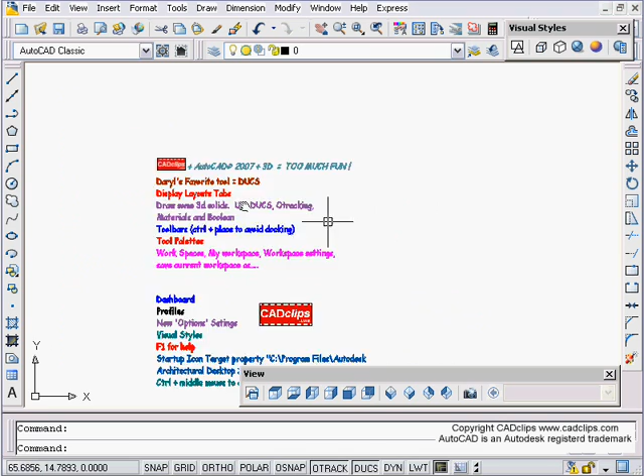I'm going to zoom out a little bit over to here, and using my view toolbar, if you right click on any toolbar, you can see all the toolbars, and there's lots in there. I'm going to start by going to, for instance, a southwest isometric view on my view toolbar. Now I want to draw some solid objects or do some modeling. So I'm going to right click in here and grab my modeling tool. We'll show you later how you can use workspaces to save all these configurations.

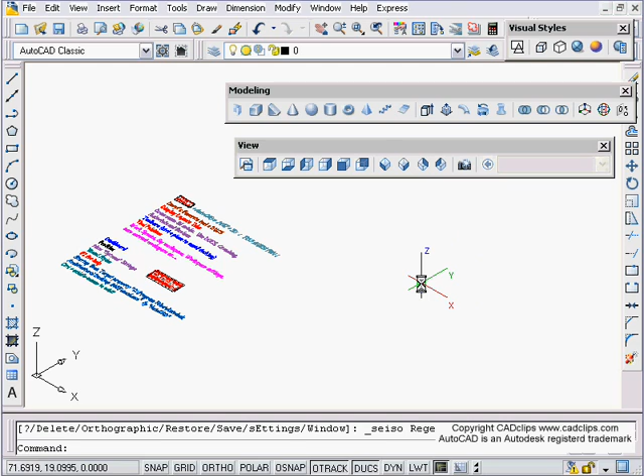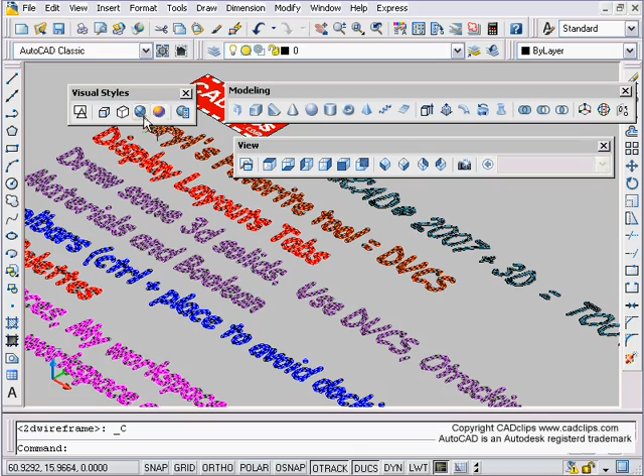So I can start by clicking on the box tool, drawing a box, placing it up. If I have my visual styles toolbar, you can click on here, and you can see different visual styles for that 3D object. You'll also notice that visual styles actually affect text as well. Kind of neat when you zoom in on it. So different things you can do with that.

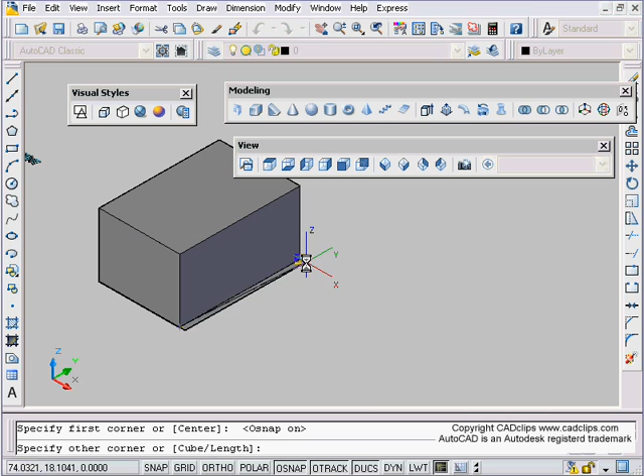Now what I can do is, to continue along here, I'm going to draw kind of a wedge here. So I'm going to click wedge. I need an object snap, so I'm going to hit my F3 or turn my object snaps on, and I'm going to use object tracking and lay a node in over there. Placing it once places it; hovering again removes it. So I need to replace that.

Now I can drag down like that, and then I can drag up, and if I can find that endpoint, I can click on there. I might have to change to wireframe to make that a little easier. Let's try that again just so you can see what's going on. I'm going to click on here.

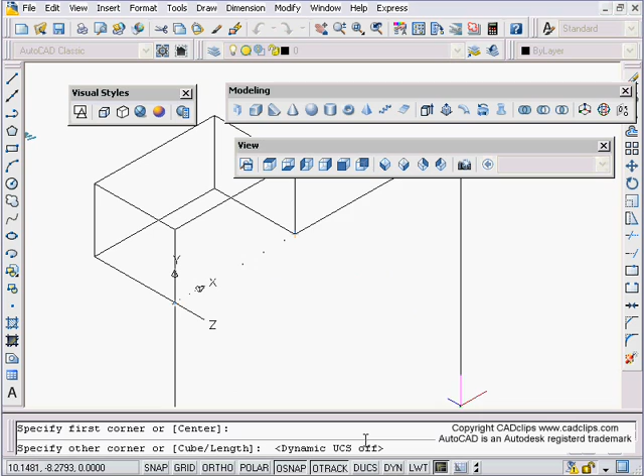I'm going to place, oh, now my UCS. I don't need my DUCS for this one. DUCS. Wedge from here. Notice it started to draw up the side of that wall. Click, and now I can go pick that endpoint. Okay, I had to turn my DUCS off because the purpose of DUCS is that I can do this.

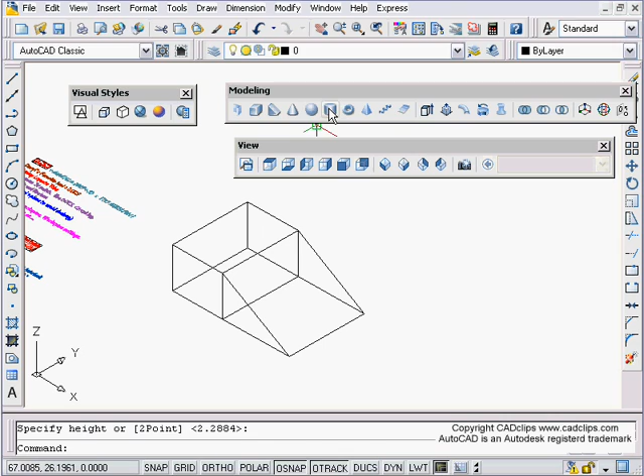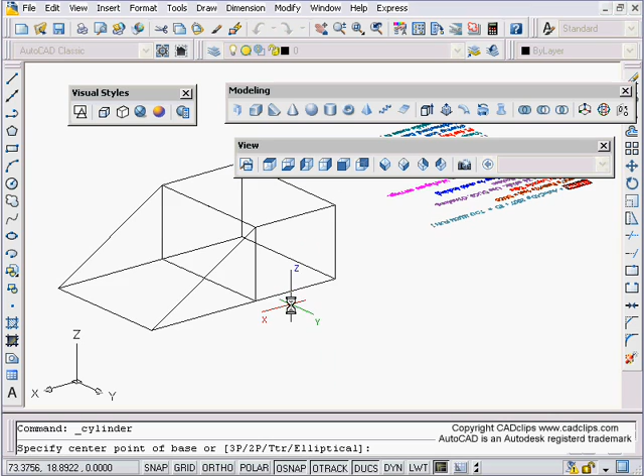Go grab, for instance, a cylinder command. If this is on, which was what was doing before, now I can hover over a different face and draw right on that face, which is absolutely wonderful. And using shift middle mouse button, you can hover around. So I can pick on a face.

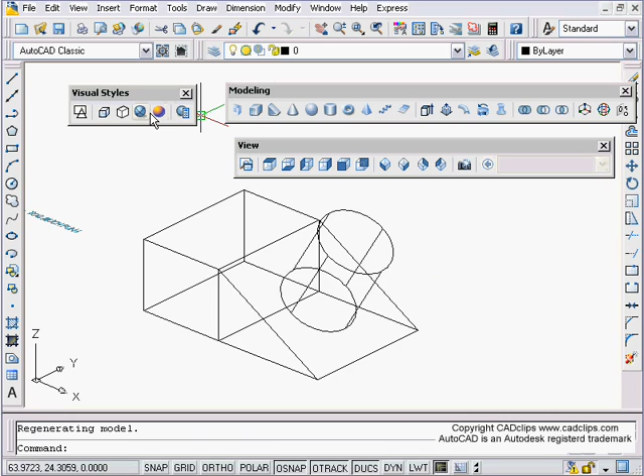Not only that, I can use my object tracking by picking points, a midpoint there and a midpoint there. And if I drag down, guess what? Now I'm drawing that cylinder directly on that face of that object. Shift, middle mouse button, spin it around, go back to my visual styles, see what I have.

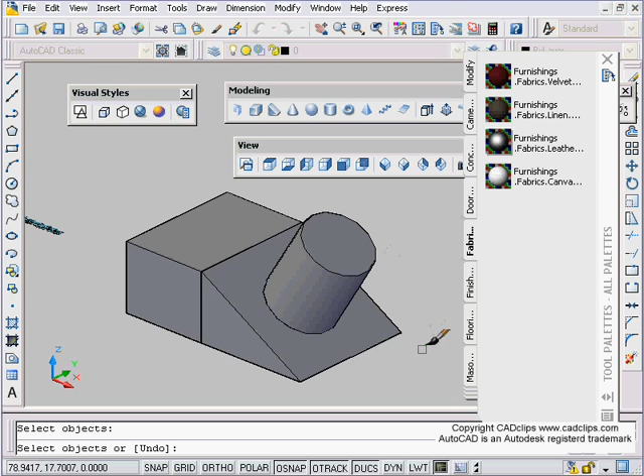I might go into here and click on my palettes. Inside of my palettes, I've got lots of different palettes in the palette set, and I can go, for instance, to a fabric material or something, and I can pick on that material and I can change that. Depending on my visual style will depend on how that will appear.

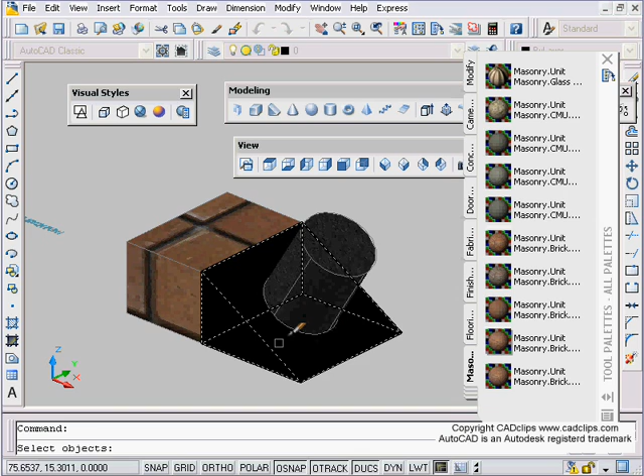Go back to here. Pick a different material, masonry perhaps. Masonry unit, brick modular. Click on there. We can talk a little bit about scale factor and sizes. Pick on here. Use that material, whatever you want. Now I want to draw a cylinder and remove it from there. So watch what happens. I'm going to draw a cylinder now.

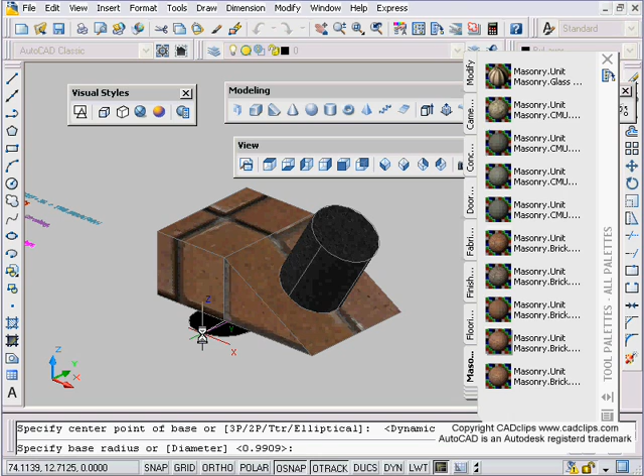The problem now is if I try to draw that cylinder, I'm going to draw on that wall, which is great if that's what I wanted to do. Off of that face, I'm going to erase that. I'm going to draw a cylinder. This is where we need to turn the DUCS off. Pick a point, drag there, drag up.

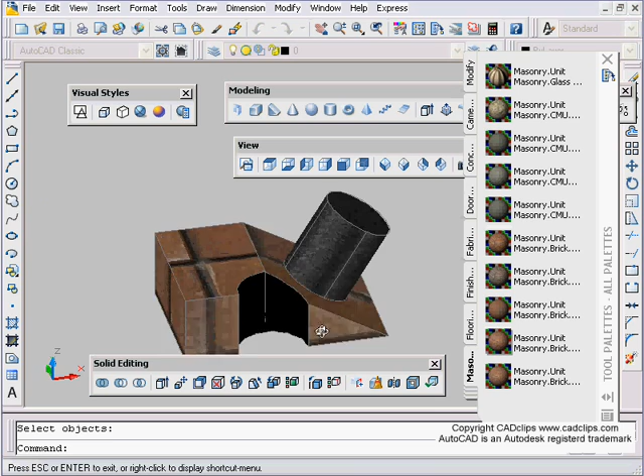Now I'm going to right click on here, go to my solid editing toolbar, and use my subtract and say subtract from here and here, enter, this object, enter, and it removes that section. Shift, middle mouse button. Anytime you want to move anything, you can click on the object, and then

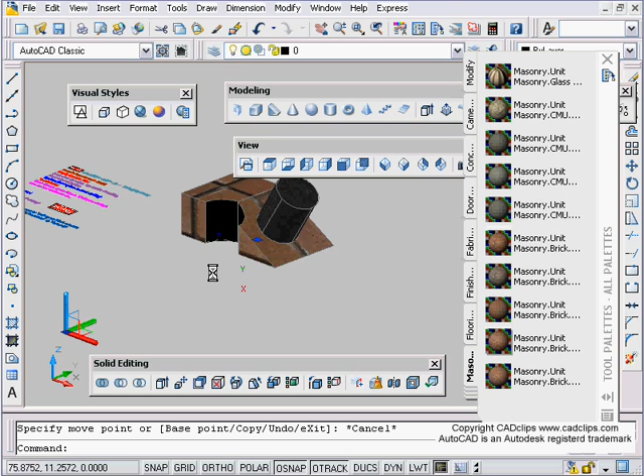if you go over to your UCS icon, you can click on an axis, and then you don't even have to say move, you just drag it on that axis. If I want to move this straight up, click on this object, hover over the blue axis, pick once, move up, and then type in a number or displacement.

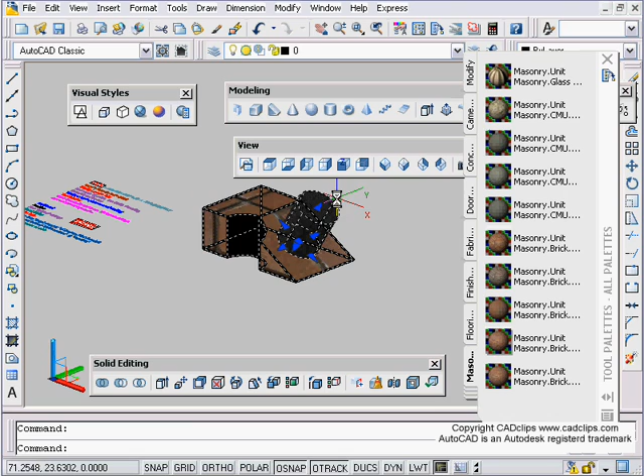What happens if I pick on here and do this? Oh, I have more than one object. Hit escape a couple times. Do a regen. Pick on this one object. Move here, and I can move that guy over there. If I want to switch in between, all I have to do is hit escape, go back and pick on here. I don't have to reselect the object.

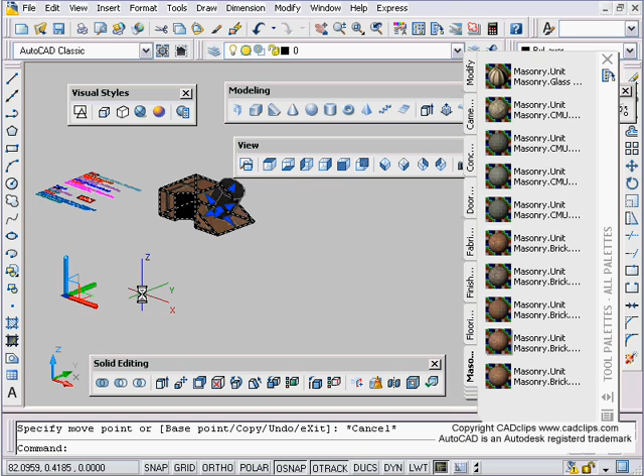Look what I'm doing. Pick on here, moving it across. So moving in 3D, combining this little tool right in here, you can type in a number, and using our DUCS command to draw on certain faces. Shift, middle mouse button, spin around here.

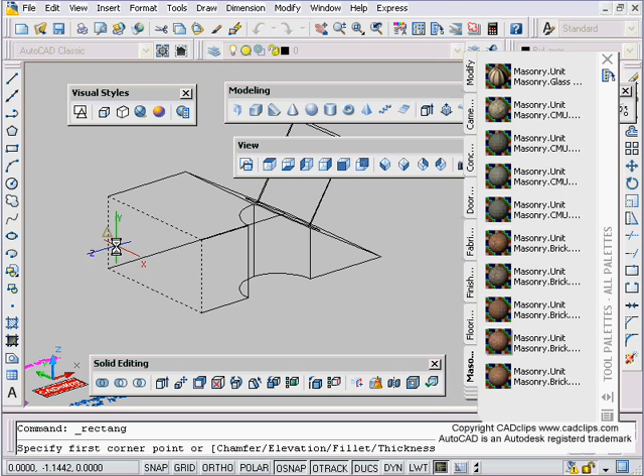Okay, maybe I'll just go back to a hidden view. I want to draw something on there. Okay, I can use my rectangle command. I can hover, place a node, and then I can track to that location, and then I can draw a box. Oh, I used my snap, but that's okay.

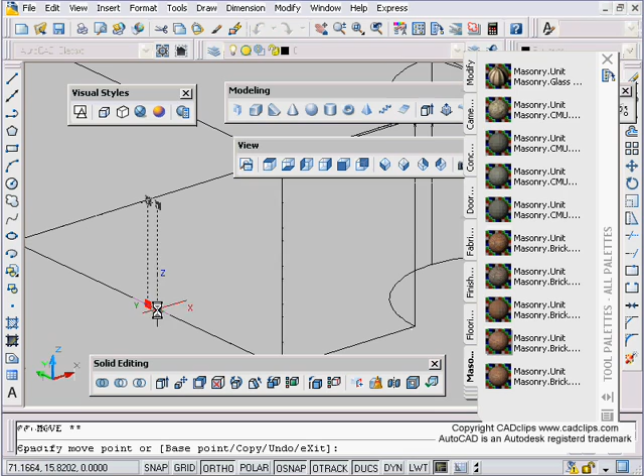I can stretch or use my shift, grab two grips, move that up. Okay, I can take that and extrude that out if I want. Extrude this, enter, that type of thing. Oh, I extruded the big piece.

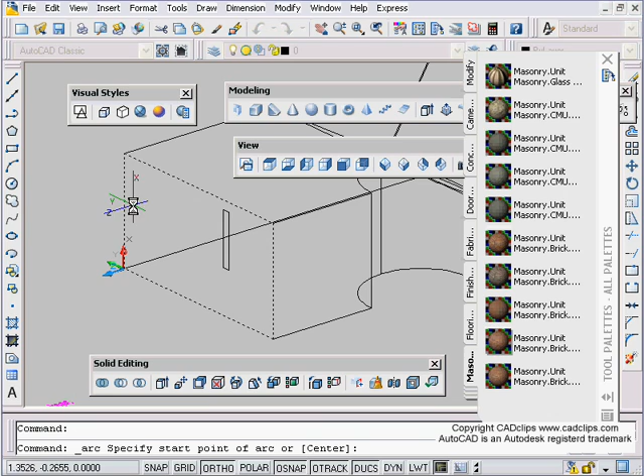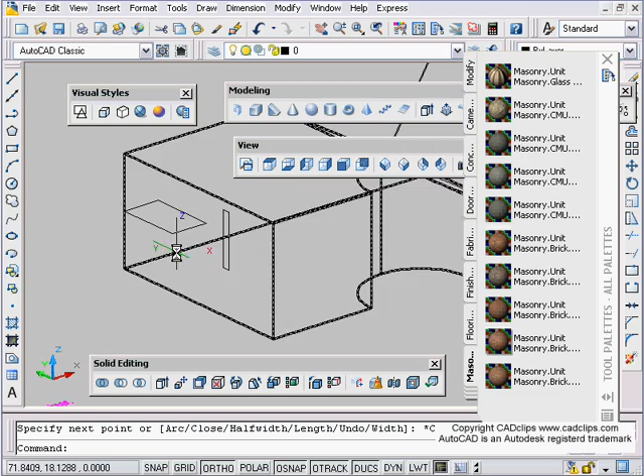Okay, so anytime you want to draw an object or an arc, you can pick a face. Wrong type of arc. Okay, maybe a polyline from here over, and around depending on what you want. Place a snap mode, click, click. Okay, start it on that face. Doesn't matter. Shift middle mouse button. You can see where that is.

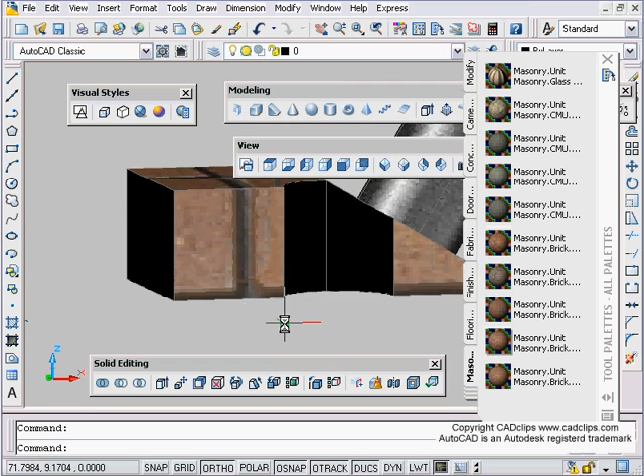Okay, visual styles, etc. So just kind of puttering around a little bit with drawing on edges and drawing on faces, and we'll get into more of this a little bit later where I'll show you a little bit more control. Okay, so let's just go back to the top view here.

Okay, use DUCS, the layouts tab, draw some solids, use our command, object tracking, throw some materials, and Boolean operation, which is our add and subtract and union and interference. Okay, we've got a bunch more in here, and we do have some more training videos and CAD clips at DGCAD or cadclips.com, which go through this specifically. I'm not going to go through all of these again. We've already got some CAD clips on that in our 3D AutoCAD 2006, so this hasn't really changed much.

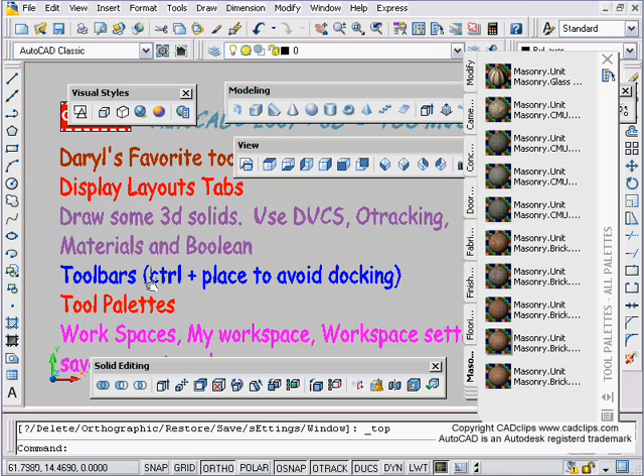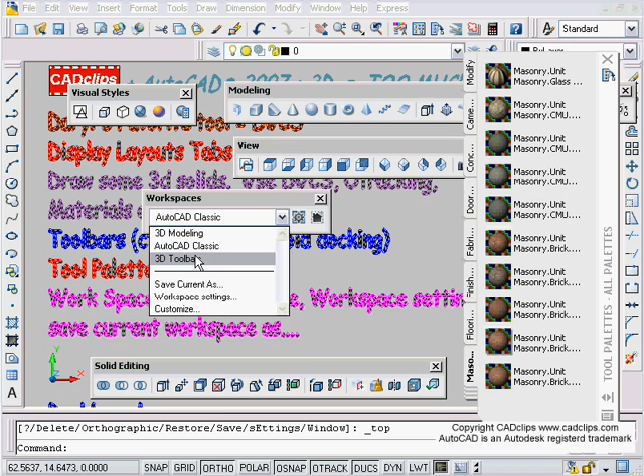So toolbars, now we can right click and get any toolbar, but we can also use workspaces. Once we get all our toolbars the way we want, we have an actual toolbar, if you right click here, called workspaces. Okay, you can't see that. Workspaces. And when that's on, you can click on here and you can switch from, I have one called 3D toolbars. Okay, and I've saved this, and it basically has all the toolbars that we use for 3D.

It's got the workspace toolbar, the modeling toolbar, UCS, UCS2, orbit, walk and fly, cameras, views, lights, rendering, mapping, solid editing. So a lot of these commands in true AutoCAD fashion are on palettes, as well as toolbars, as well as menu clicks, as well as typing. Okay, so I just happen to have a workspace called 3D toolbars.

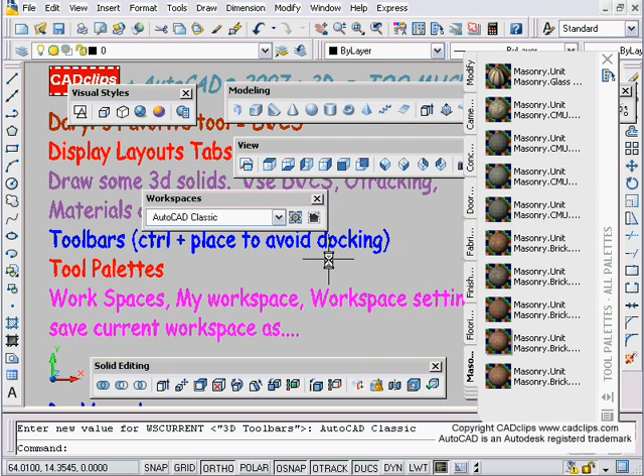Okay, if I turn this off and then I switch over to here, watch, I'll turn the modeling one off as well. Okay, and I'll switch over to the AutoCAD Classic workspace. Okay, this remembers this was the one I was working in beforehand. Okay, now watch, I'm going to go back and switch from here to be my 3D toolbars. And it remembers that I have these toolbars turned off.

So what happens here, and we have one called My Workspace. Okay, we also can go in here and say Workspace Settings. Automatically save workspace settings. So when you switch workspaces, wherever you left off is where it will come back. We used to kind of control this with profiles, and now it's a little bit better than profiles. Okay, you've got new workspaces inside of there. Okay, if I hit escape there, if we go down here, we can say save current as. Well, maybe, I've got these three, I'm going to make a new one.

So maybe I'm going to turn this off and this off and this off and this off, and I can change the screen of my background. I can turn palettes on and off. I can do whatever I want. Okay, then I can go back to my workspace, probably through my workspace toolbar actually is the best way. And then I'm going to say save current as, and then I'm not going to use those. I'm going to use a new one and just call it CAD clips, and save it.

Now I've got a workspace called CAD clips, and then I've got one called 3D toolbars. Okay, and then I've got one called 3D modeling, which comes out of the box with AutoCAD.

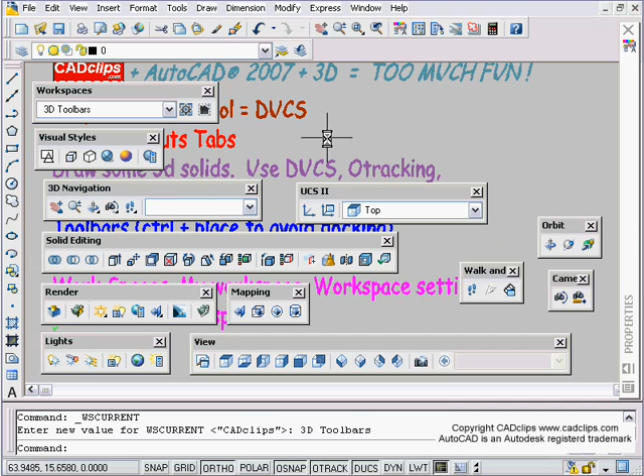Also, when you start up AutoCAD, it'll ask you in the window with the green background what workspace you want to start in. AutoCAD Classic and AutoCAD 3D Modeling are the two defaults, and I've created one called 3D Toolbars and one called CAD Clips just now - it's a combination of all your palettes, your environment, and your toolbars.

I'm just going to switch back to AutoCAD Classic so I can get rid of some of this stuff and check my notes - visual styles, modeling, etc. Lots of interesting stuff in the palettes themselves right now, because we've really seen some great improvement in palettes.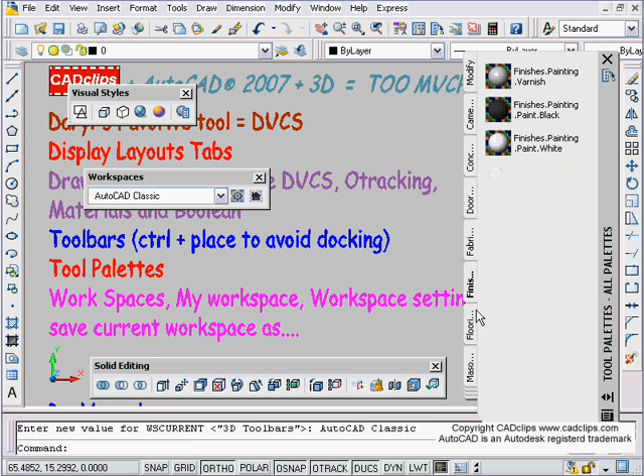So if you click down in here - annotation, architectural, mechanical, electrical, all good stuff, and some materials, etc.

Down in here, you can right click on a palette anytime. You can make it dockable, add transparency to the palette, customize it - which is the same window we were just in - or make a new palette. You can drag objects from the screen to the palettes, drag stuff from the customize window to the palettes, and then use the palettes.

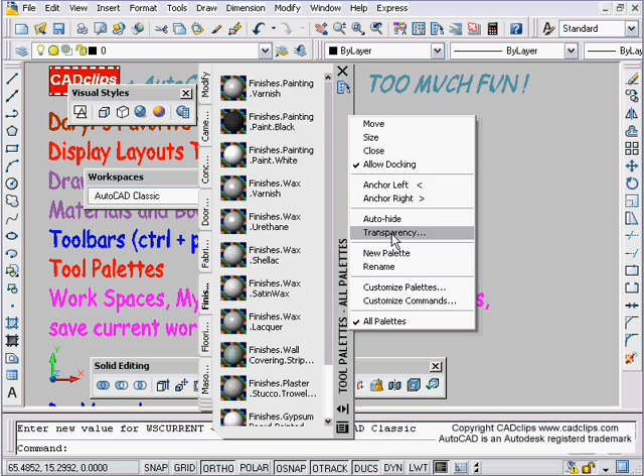Your palettes are saved under your options. If you right click here and pick options below, go into files, you'll see inside it says tool palette locations - that's where your tool palettes are being saved.

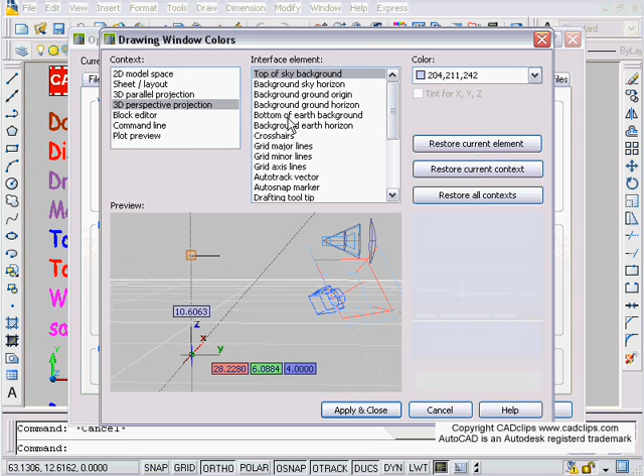Then we've got our profiles over here that we can have set up. 3D Modeling - there's a new tab in our options. Have a look around at all of this stuff. Selection has changed a little bit - drafting, selection, some of this was new in 2006 and 2007, so have a look through it. Display and colors and lots of different ways of setting up your screens and restoring the different features.

I've just noticed one last note here with toolbars. If you ever try to place a toolbar and it keeps docking itself and taking up space, if you hold your control button in first and then click it, you can drag it in and it won't morph or dock itself like this one's doing over here - it's docking itself inside.

And that concludes the first, just the intro to our new AutoCAD 3D lessons. We'll do another intro lesson next, and then we'll slow it down and actually do some drafting and 3D modeling where we can see the tools in action. So stay tuned for more great 3D information.